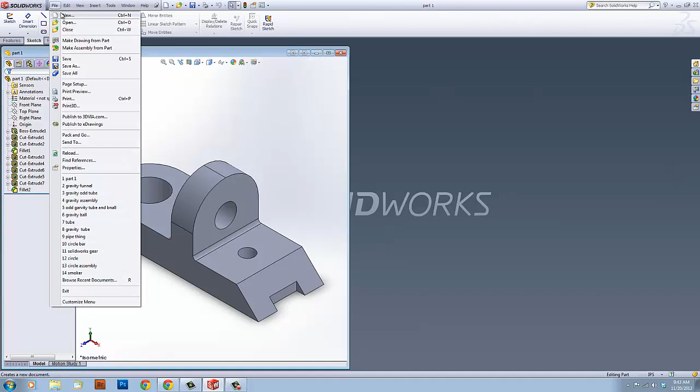Well, what I'm going to do is, I know I'm going to keep it to the left. I don't know how many of you have this capability. I know SolidWorks 2010 doesn't have it. I don't know about the others. So we're going to go to File, New, Part, okay. And I'm going to put it on the right so we can go back and forth and look.

Well, the first thing I would do for this part is I would draw a rectangle and extrude it to this area here, which is an inch. So I'm going to grab a rectangle. Now I do know the dimensions from here to the tip of that arc is 8 inches, and from here to here is 3 inches. So I'm going to go and do that. And from there to there is an inch.

I know from this, the center point of that arc to right here is 3 inches. So that makes the rest of this from there to there 5 inches. So I'm going to go and extrude all of that. And from this line to this line is 1.25 inches. So I'm going to get that out of the way.

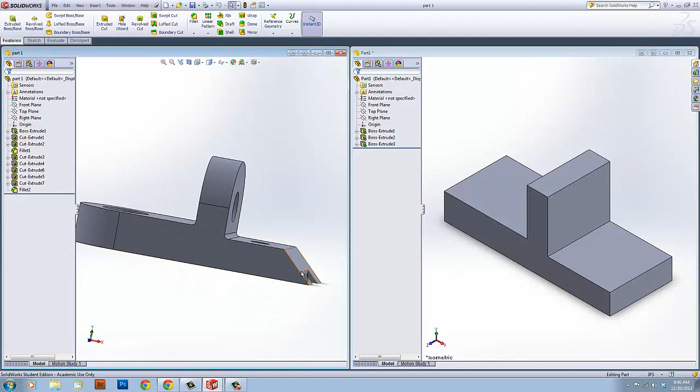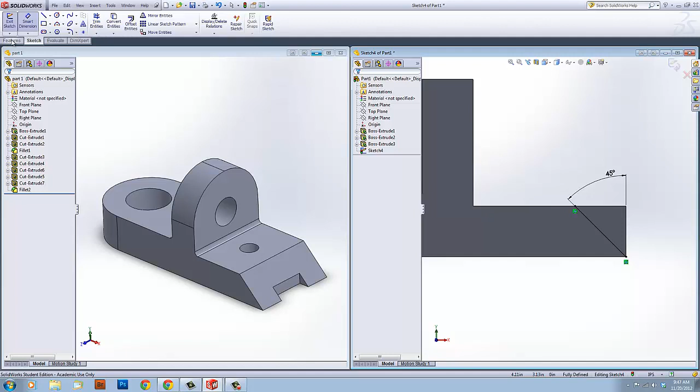Now I'm going to draw this cutout, and that's a 45-degree angle. So let's do that. Now a cool thing, I don't have to draw the rest of the triangle because I'll extrude cut, and it gives us this plane that it's going to cut out. And see, right now it's pointing that way, so it'd cut everything on this side of the cutting line, but if I flip that, it will do everything on this side. Okay, there you go.

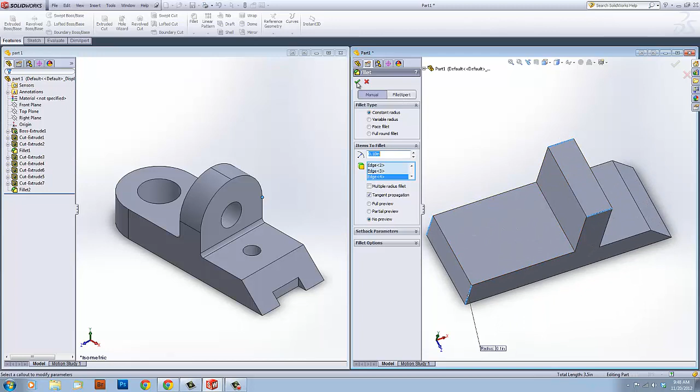Now we're going to go ahead and do some of the fillets. I know that these 4 corners right here are all 1.5, so I'll go ahead and do those first. And the two that are right here, there's one on the other side too, are 0.13 inches. Oh, it's on that side, my bad.

Sorry guys, not really thinking too well today.

So now we're gonna do these three circles, or holes. Start here. Now, if you click on the fillet, it will give you the circle at which it started. And this circle happens to be an inch in diameter. And we'll do the same here, but the diameter is 1.5.

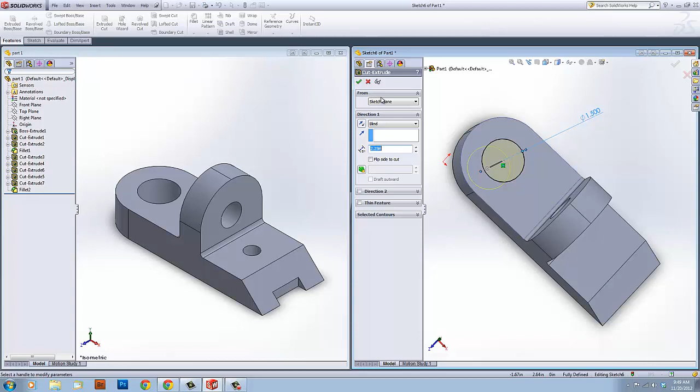And then there's this one right there. Oops. Sorry. Now this circle is 0.625. It is 1.5 inches away from there and 1 inch away from here.

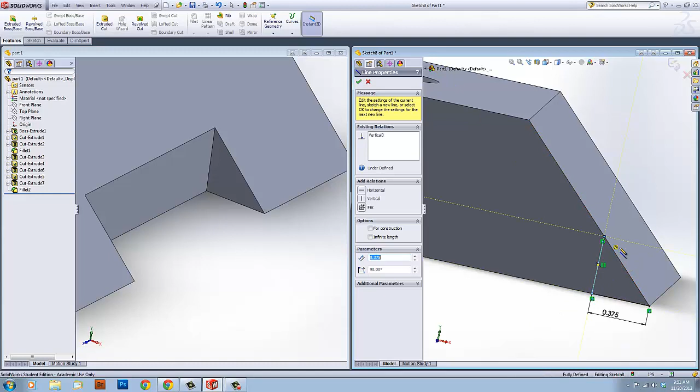We're pretty much done. We've just got to do one more thing, and that's that little cutout there. So what I did was I sketched a triangle out right here, and it says that from this line right here is 0.375. So drop me my line. And just go straight up. Sorry about that. Now we will extrude cut.

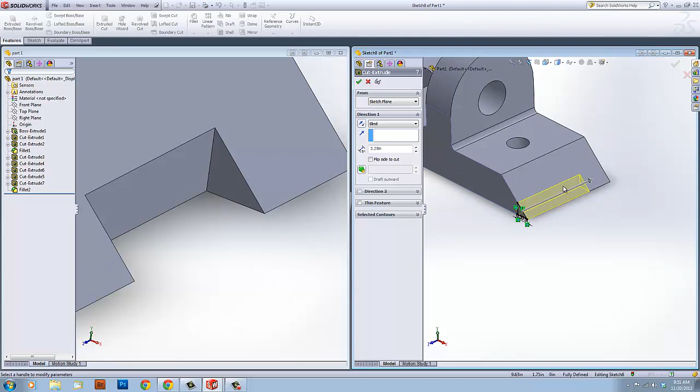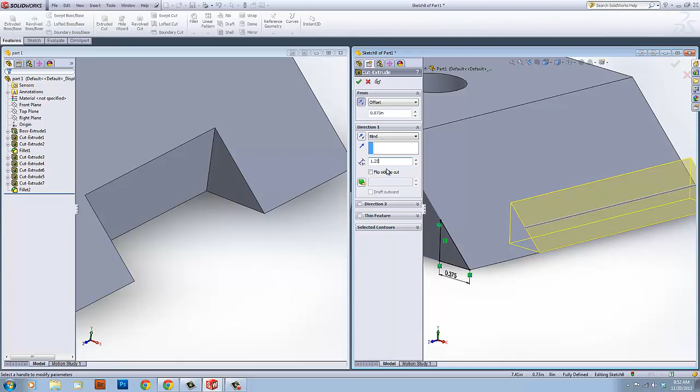Now see, on this one it starts in the middle, and you guys are probably thinking, well, how are you going to do that? Well, we're going to do offset, and the gap between there and there is 0.875. And we'll flip the direction. There you go. And it says the distance is 1.25. Looks good. There we go. Same part. It's not too hard.

Now, I've already saved this part, but I'll show you how to save it. You go up to File, Save As, save it as YouTube first part.